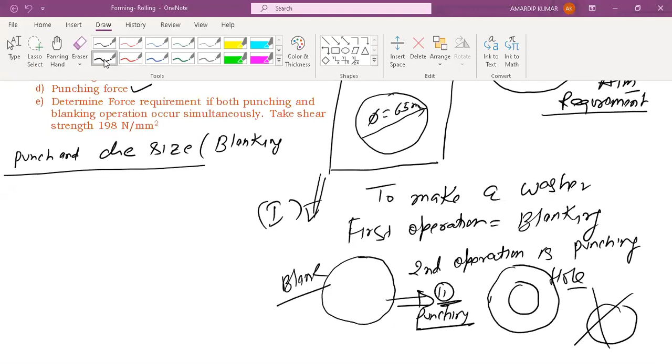So we were discussing what you call washer making right now, because in that example we will want to understand. So first operation is your blanking, then you are punching. So first, we will design punch and die for blanking.

We know in a blanking, die size is equal to blank size, and punch size is equal to die size minus 2c.

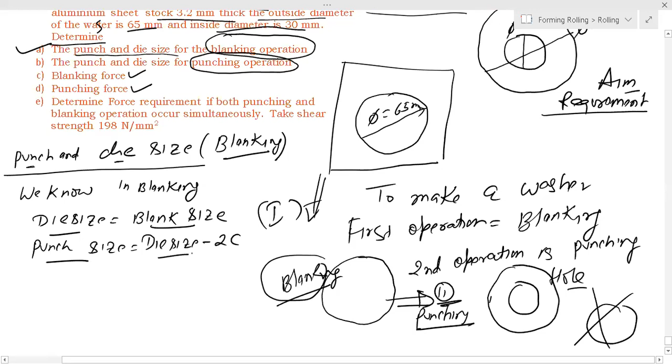So this we know: punch and die size design in blanking operation. Die size will be equal to blank size, and punch size will be smaller, that is die size minus 2c. We don't know what is c, but c is equal to 0.0032 t root tau s millimeter.

So you know thickness is 0.0032 into 3.2 into root under, it is given here 198. So you can calculate value of c. C will be in millimeter, and that c value will come 0.144 millimeter.

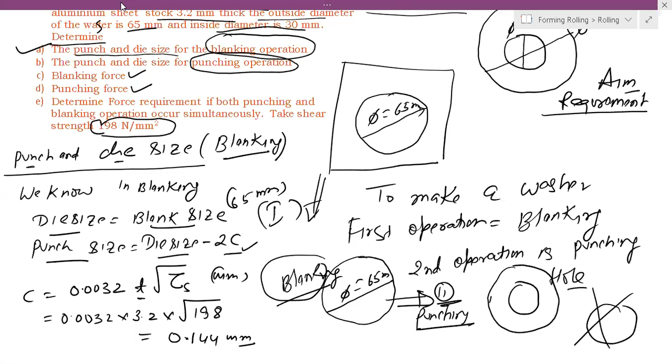So once you got C value, you can calculate punch size. What is blank size? Blank is 65 mm, because blanking operation is this one right now, this diameter is your 65. So your die will be equal to 65 mm, and punch will be equal to 65 minus 2C, where C we get from the relation, and that comes out 0.144 millimeter.

Everybody is following me?

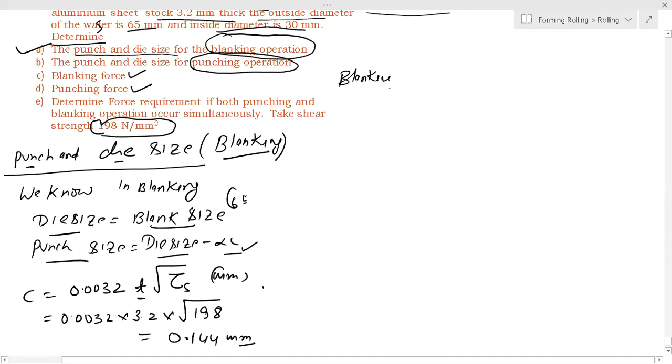So in that blanking operation, your die size will be equal to 65 mm, and punch size will be equal to 65 minus 2 into 0.144. Right? So you got this.

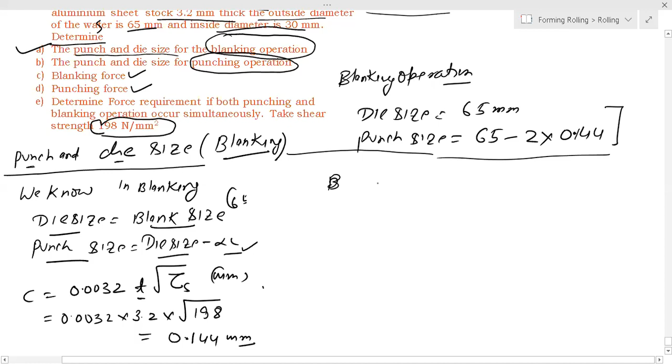Now after blanking, we will make a hole on this blank, so we need a punching operation. So we got a blank size of 65 mm. Now we'll make a hole. How much hole size we want? We want 30 mm.

And we know punch size is equal to hole size, and that is equal to 30 mm. Now die size will be equal to punch size plus 2C, that is 30 plus 2 into 0.144 millimeter. Is it clear?

Everybody got this? Everybody understood this design of punch and die in a blanking and punching operation? Yes, no, maybe? Please write yes, yes, yes, no. What about the other guys?

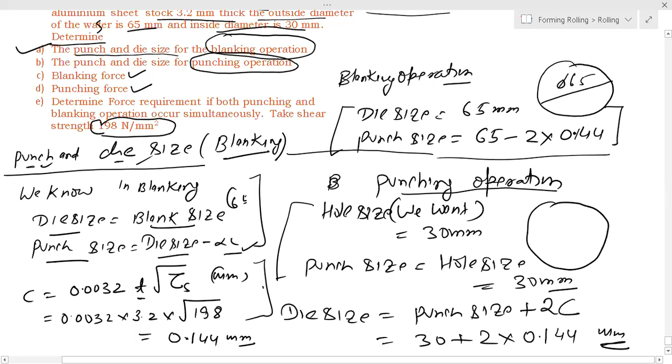What we did in punch and die size, we estimated from the formula. Clearance, we got the empirical relation. Then for punching operation, we use that same formula, and that's over. Then we have to calculate blanking and punching force.

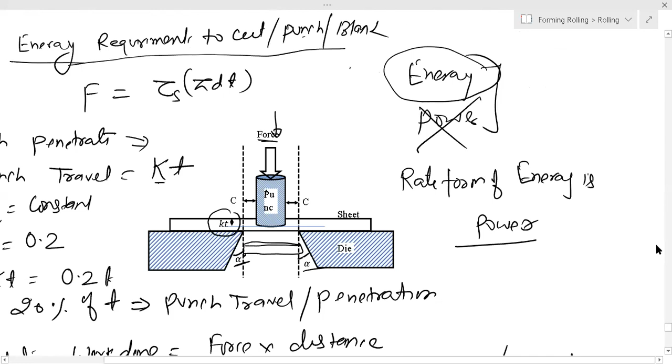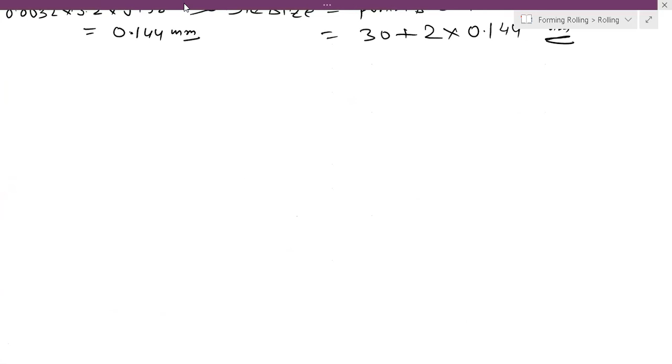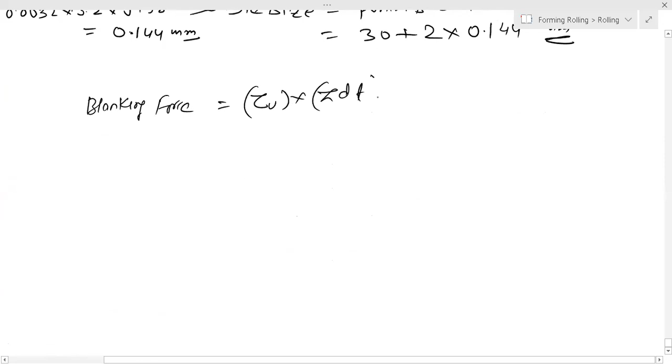Now blanking force is equal to tau ultimate into pi dt. Here diameter you have to take 65 mm, because in blanking operation this bigger diameter is cut, this 65 mm is cut. So diameter you take 65 mm, thickness you know 3.2 mm, and ultimate shear strength you know 190 Newton per millimeter square. You can calculate.

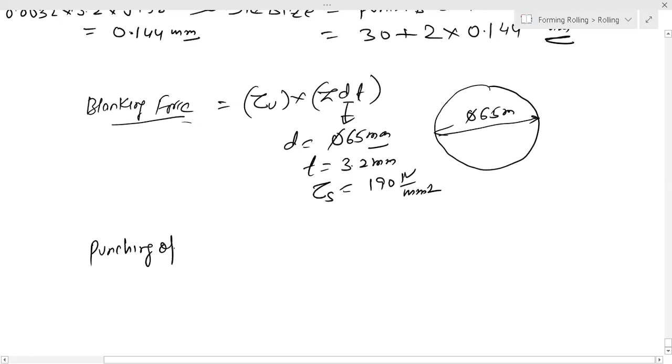Then punching operation, that is punching force is equal to tau ultimate shear strength into pi dt. This d you take here diameter 30 mm, and thickness is same 3.2 mm, and tau s is equal to 190 Newton per millimeter square.

So this blanking force will come 263760 Newton, that is the answer. And this will come your 369264 Newton.

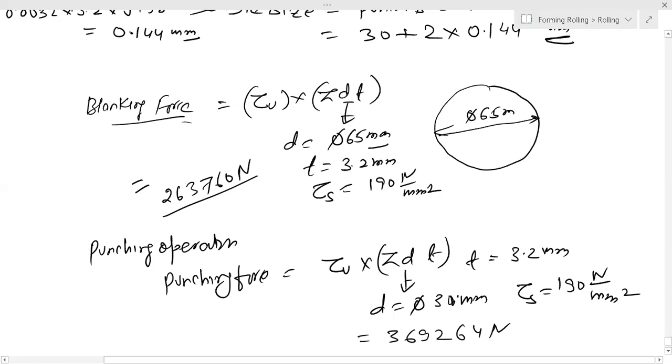Now question is, when both operations are done simultaneously in a compound die, means the force will be equal to total force equal to blanking force, means in one operation both punching and blanking is done. Means your die is like this, you have bigger die, you have smaller die, you have this much, right? Something like that. So in one operation, force will be equal to F1 plus F2.

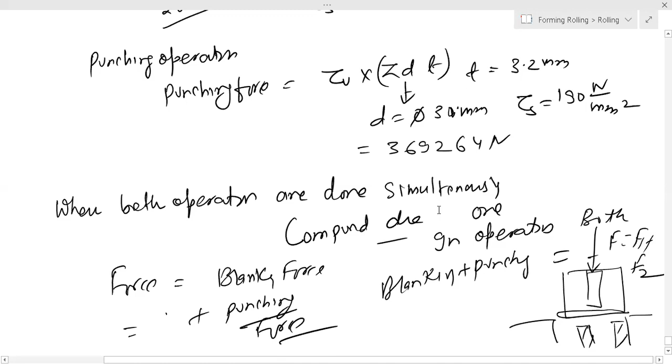That means force will be your blanking force plus punching force. Just you have to add, that's all. Because both are done simultaneously, so force will be double, I mean equal to punching force plus blanking force.

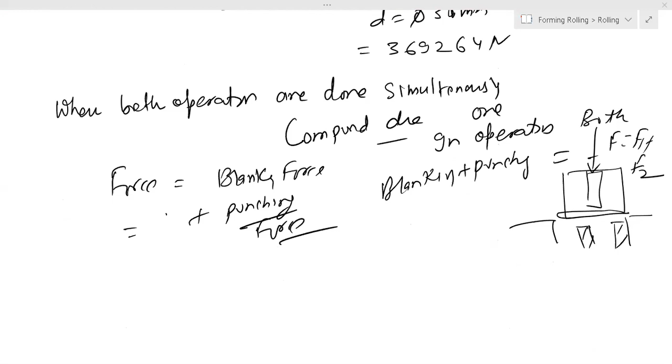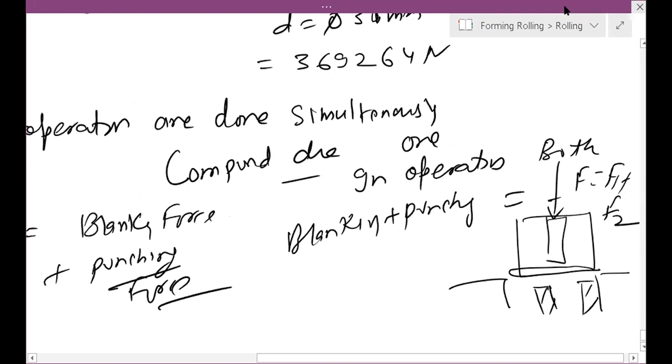So now I think it's clear to everybody. Now we'll move to another problem, we'll solve another problem.

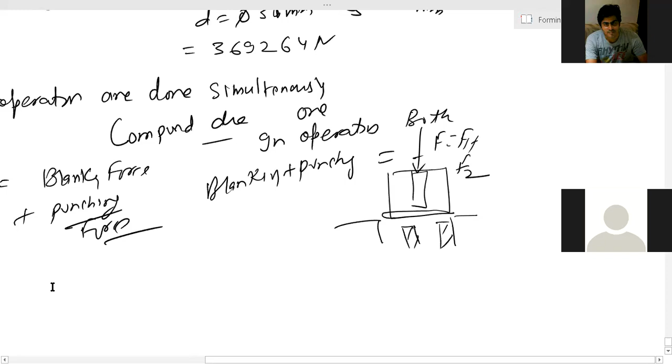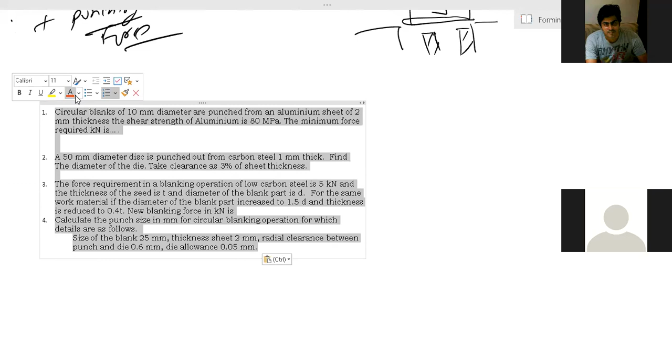So now we have 4 more problems. We'll solve them one by one.

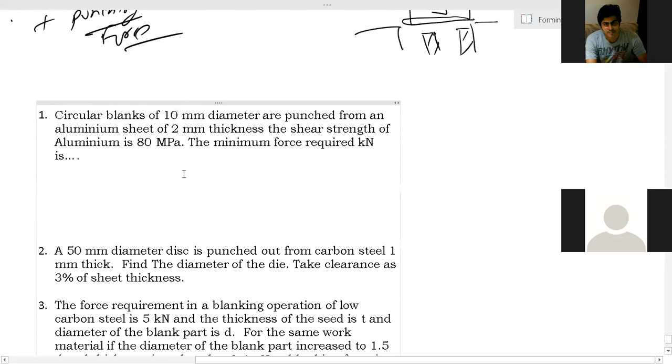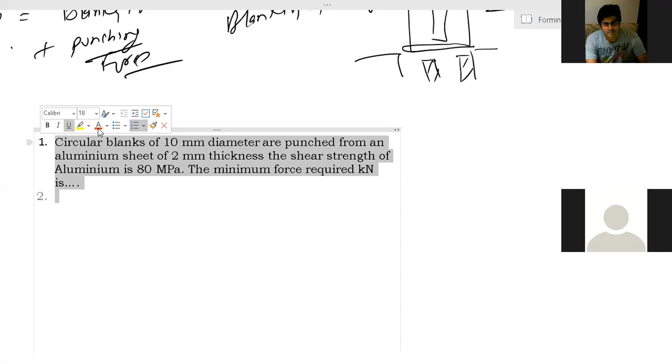A circular blank of 10 millimeter diameter is punched from an aluminum sheet of 2 mm thickness. The shear strength of aluminum is 80 megapascal. Minimum force required - very easy. Let's take questions, somebody asked me some doubts.

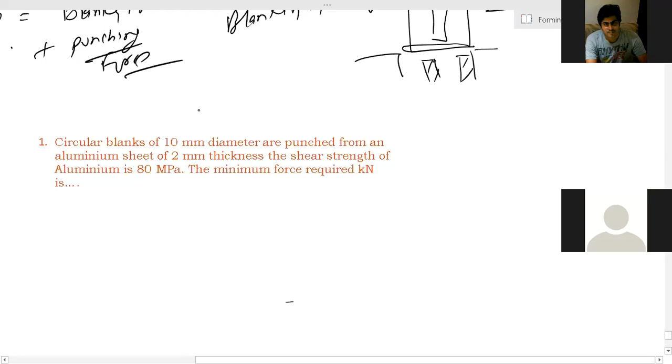Is the punch same? No, punch and die both are not same. Compound die means punch is not same. The arrangement is that we have different sets of punch and die for blanking and different sets of punch and die for punching. In a compound die, both arrangements are there - two sets of die, one set of punch and die for blanking and one for punching. Same will not be used. You have two punches here - one small punch, one bigger punch.

So a circular blank of 10 millimeter diameter is punched from an aluminum sheet. So you have the diameter of the punch.

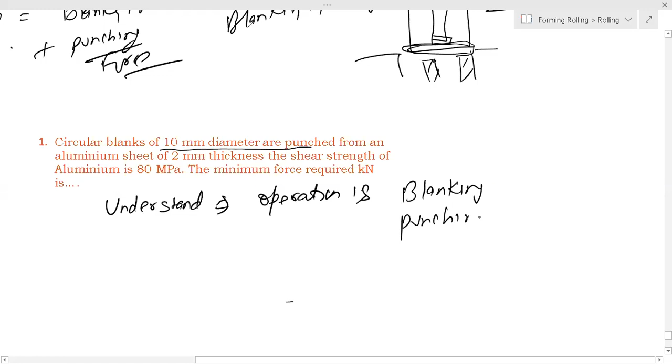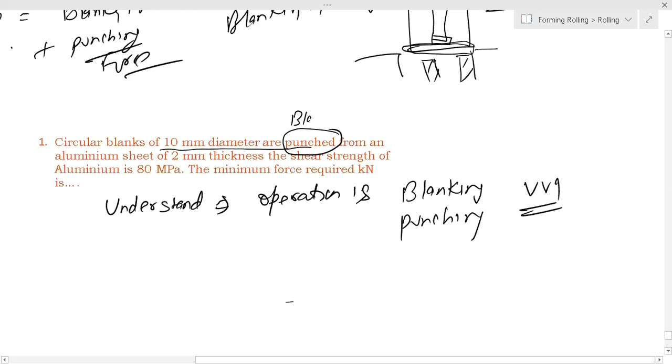First you have to understand whether the operation is blanking or punching. This is very important to identify the operation - you must know the operation. A circular blank of 10 mm diameter punched means it is a blanking operation.

Blank of that diameter is punched from an aluminum sheet, shear strength of aluminum given. The minimum force required - what is the useful thing here? First you have to check: circular blank of 10 millimeter diameter is punched, meaning this diameter blank is punched, not a hole.

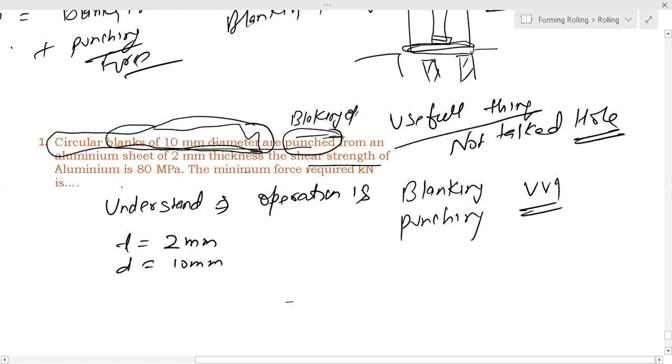Anyway, thickness is 2 mm, diameter is 10 mm. Shear strength of the aluminum is 80 megapascal. Tau S equals 80 megapascal, meaning 80 Newton per millimeter square. So required force equals tau S into pi d t. Put the value, get the answer.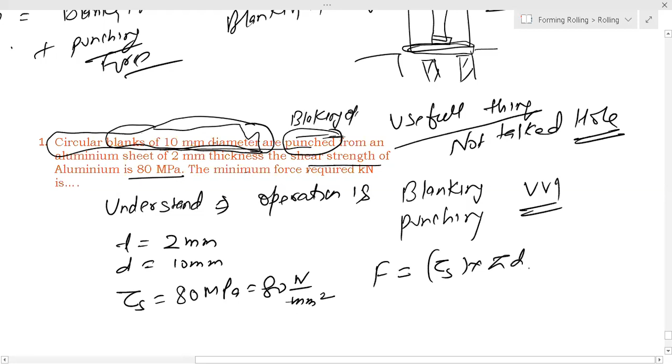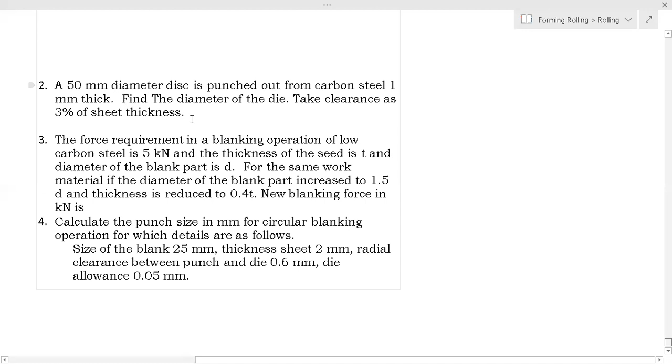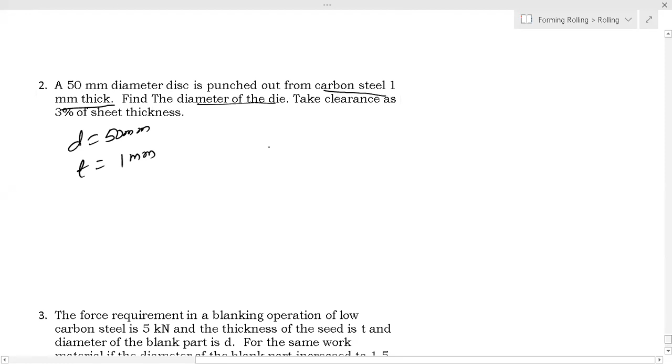Now, a 50 mm diameter disc is punched from carbon steel 1 mm thick. So diameter is 50 mm and thickness is 1 mm. Find the diameter of the die. Take clearance as 3% of the thickness. So C equals 3% of thickness, that is 3 by 100 into thickness of 1 mm.

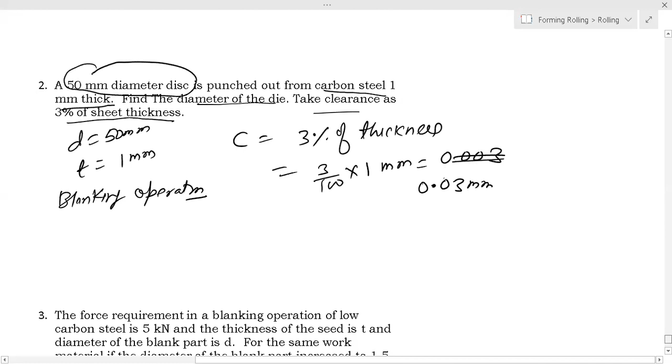That means... is it 0.003? No, 0.03, am I right? So we have to find - this is a blanking operation. Why blanking operation? Here they have talked about a 50 mm diameter disc, not talked about a hole.

So die size equals blank size, that is 50 mm. That's all, diameter of the die. The clearance value is not used here, not used.

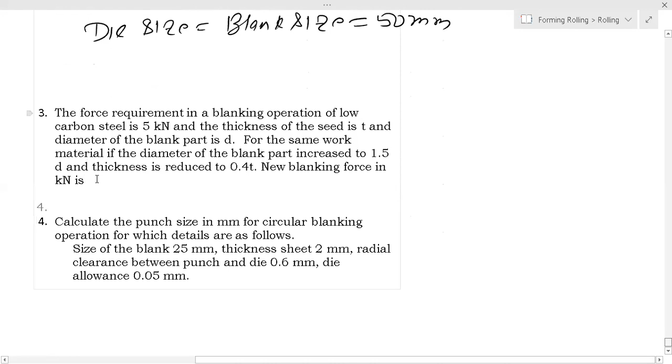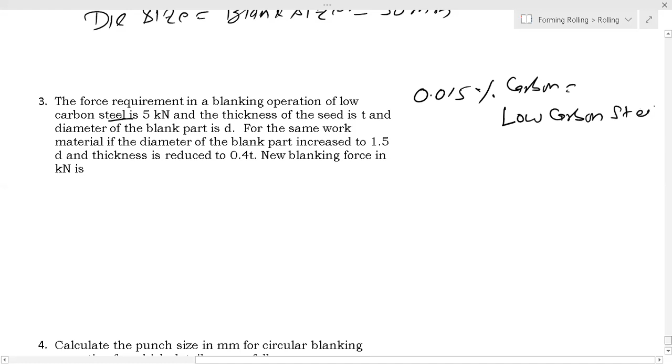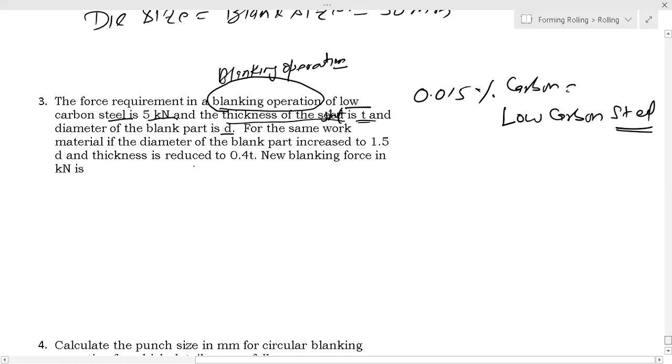Now the third problem: the force requirement of a blanking operation. The force requirement in a blanking operation of low carbon steel - if 0.015% carbon, then we call it low carbon steel. Force requirement in blanking operation, clearly said blanking operation, of low carbon steel is 5 kilonewton, thickness of the sheet is T and diameter is D.

For the same work material, if the diameter of the blank part is increased to 1.5 D, suppose D dash, and thickness is reduced to 0.4 T, so T dash equals 0.4 T, what will be the new blanking force? F dash equals what? This is the question.

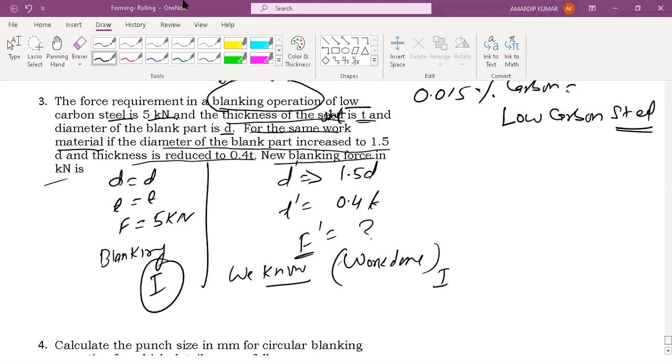So how to calculate F dash? We know - energy can neither be created nor destroyed. So work done in the first operation... no, what - how to calculate this F dash? You have to calculate F dash, right? Not work done here, the work done formula will not apply. We'll calculate F dash. What is the issue? It is very easy.

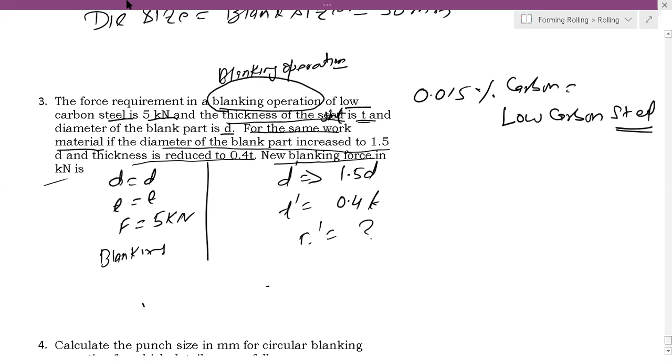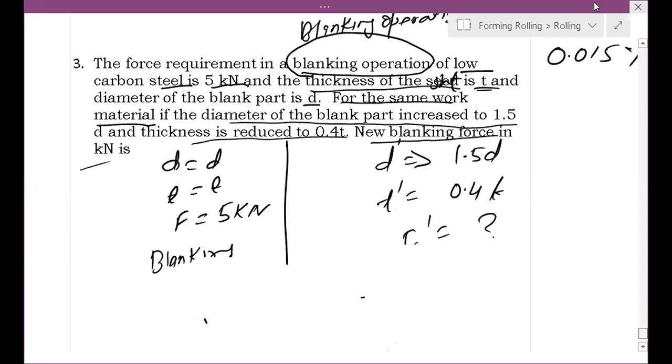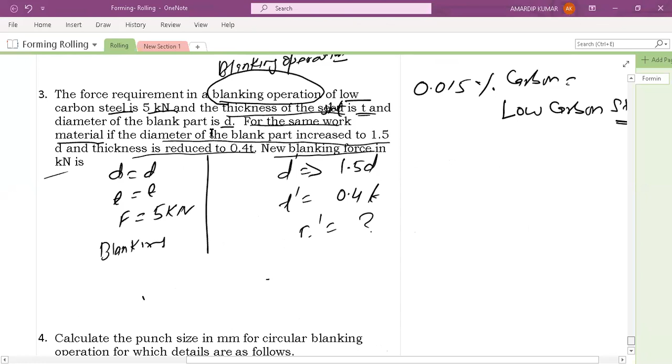So we are discussing that right now. We have to calculate F dash. So F dash equals what? Material is same.

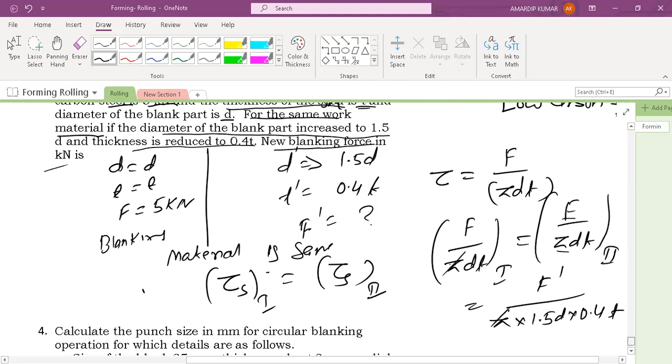Material is same, meaning tau S in this case and tau in the other case are the same. And you know tau equals F by pi d t. So for the first case and the second case, F by pi d t for the first case equals F by pi d t for the second case. F dash is what you have to calculate - pi is same, diameter is 1.5 D, thickness is 0.4 T. So pi cancels, and you know F value is 5 kilonewton. You can calculate what F dash is.

Clear to all? Did you understand this? Please tell me whether understood or not - because material is same, the answer is 3 kilonewton. Very nice, very good, nice Rajat. Material is same, so shear strength is the material property, it stays the same. So we just equate F by F, and F dash is found. Is it clear to all?

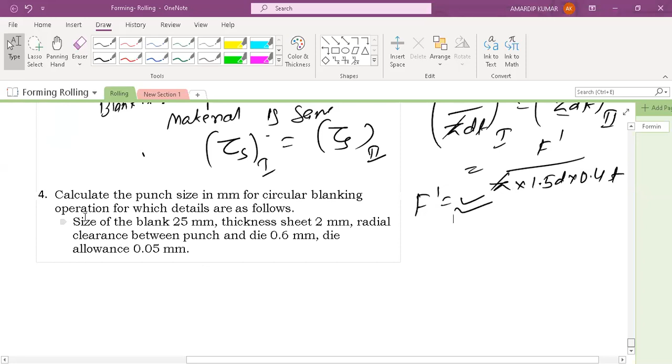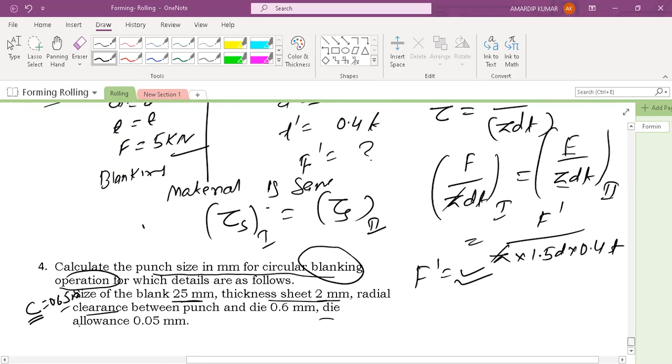Now we'll solve the last problem. This question I leave to you - here one term is the die allowance. Calculate the punch size in millimeter for a circular blanking operation. So this is your blanking operation. Size of blank is 25 mm, thickness 2 mm, radial clearance C is 0.6 mm, and die allowance is 0.05 mm. What is the die allowance?

KT is your punch travel, that is used to calculate energy - that is, punch travel into punching force equals energy.

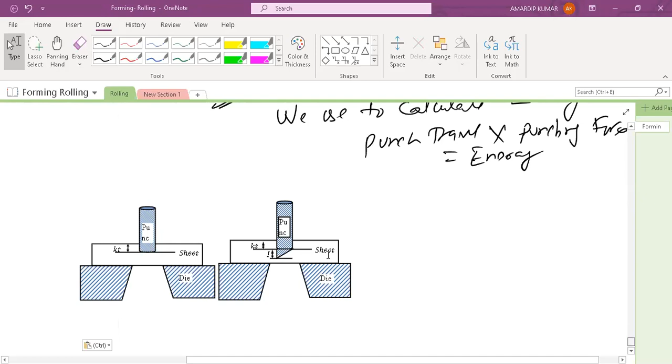Energy or method to reduce force. We are going to discuss this method to reduce the force, that is cutting force. We are going to discuss method to cutting the force.

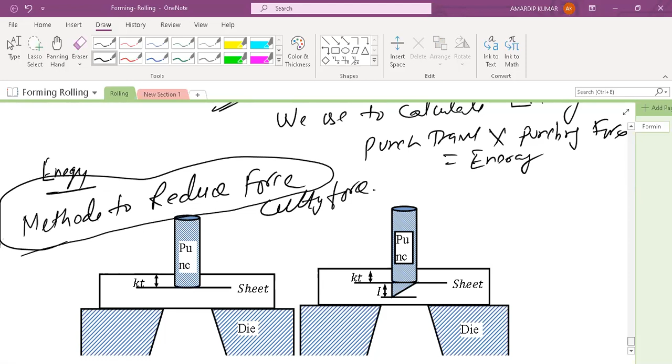This problem I left to you. Okay, we'll solve it, blanking right now.

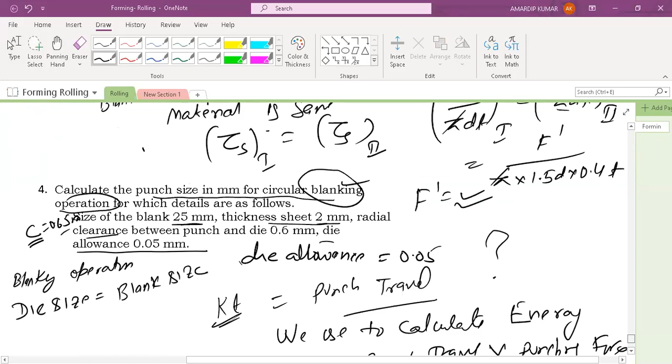So blanking operation. In that blanking operation, die size is equal to blank size. Here blank size is 25 mm. So it is 25 mm. But plus we have to add this die allowance, that is 0.05 mm. That's all.

Whenever die allowance is given, simply add it with the die size. Allowance is actually minimum clearance. So it is blanking operation. You have die size equal to blank size, 25 mm, but die allowance is given, so you have to add this. That's all.

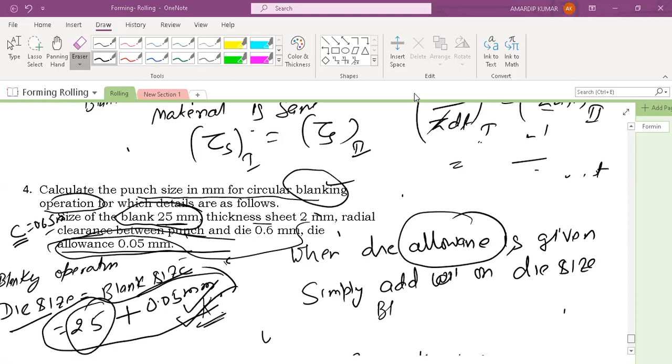Fine, fine, fine. Now I'm coming to this important topic, and then we'll finish.

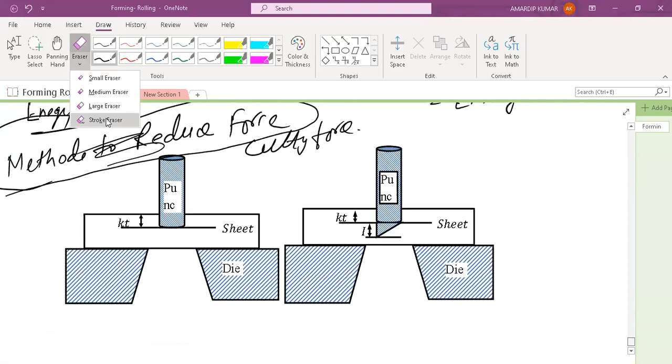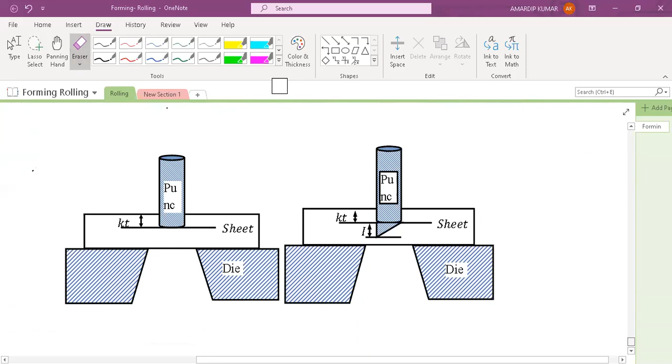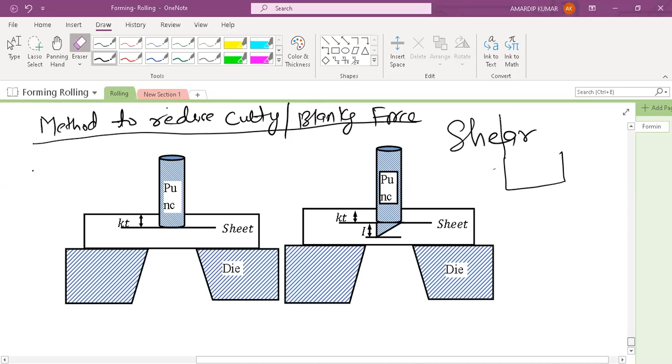Method to reduce cutting or blanking force. One term is called shear. This is our punch. This we call actually flat punch.

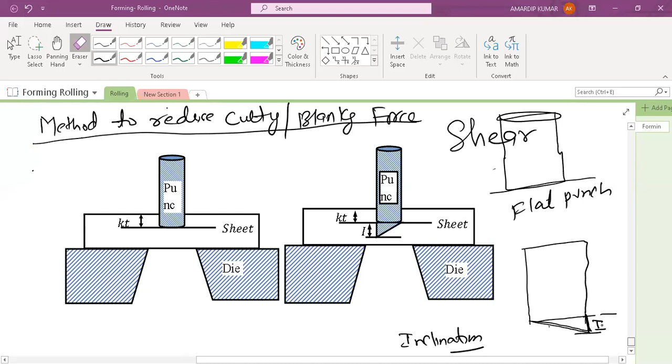But if this extra inclination is given, that is called shear, I. This I, in millimeter, is called shear. And what is I? Suppose this is theta, so if it is given, then you can calculate I. So I is basically the inclination.

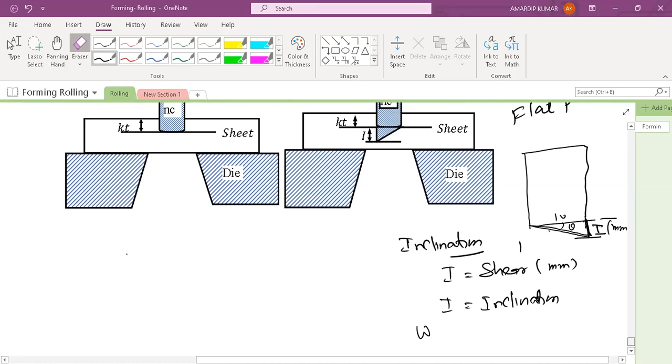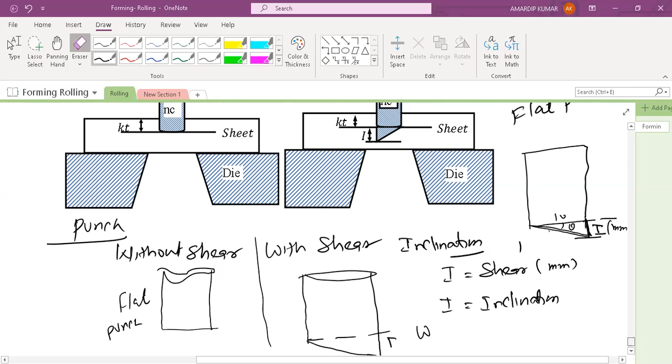So basically punches are two types: one is without shear, one is with shear. Means you have flat punch, and then you have punch with shear, punch having shear. So you are doing this operation with flat punch, and with punch having shear. This is your flat punch, and this is your inclination, and this I is your shear.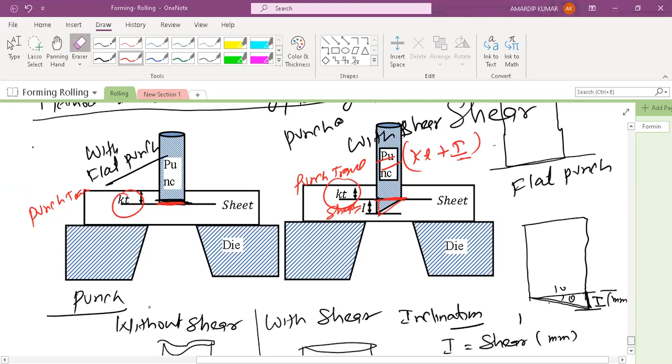KT is your punch travel. This KT is your punch travel. Here punch travel is KT plus I. This is the extra punch travel, that is I, due to this shear. So we are doing this operation with a punch having shear, and a punch not having shear, right? The punch is not having a shear.

So energy is same, means work done in both cases is same. Energy can neither be created nor be destroyed. Same thickness sheet, same material, same die, punch is different. So in this case, force into KT, and in this case F dash into KT plus I. Force into punch travel, force into punch travel. What you see here, F dash is equal to F into KT divided by KT plus I. So F dash is less than F.

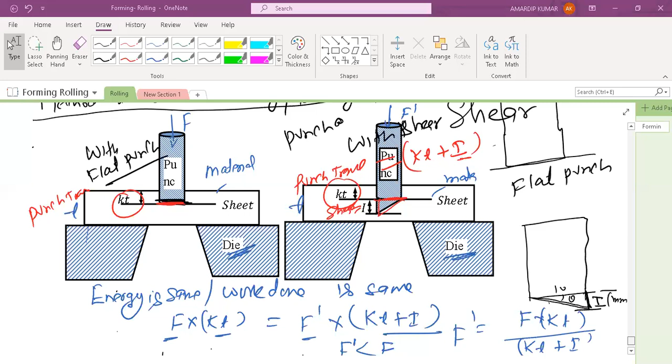I have the query, is it only the matter of punch travel or some angle? It is only a matter of punch travel, because it matters only that I. You see my notes, Shubham, you see my notes, I have given you.

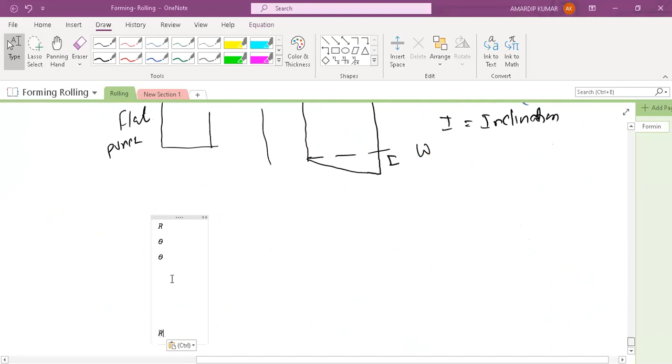Just now, can you see the different punch with shear? Can everybody see the shear? So I'm talking about this, I'm talking about this I. And this is the theta. So theta and I are related, I and theta are related. It is now clear, this is I. This is rounded, this is again I. Now it is clear, Shivam.

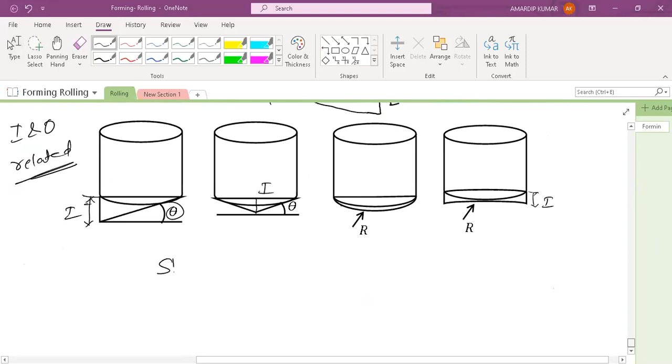Okay fine. So now what we have understood is what actually shear does. Shear provides extra punch travel, and then F dash is less than F. Force reduces because of shear on the punch.